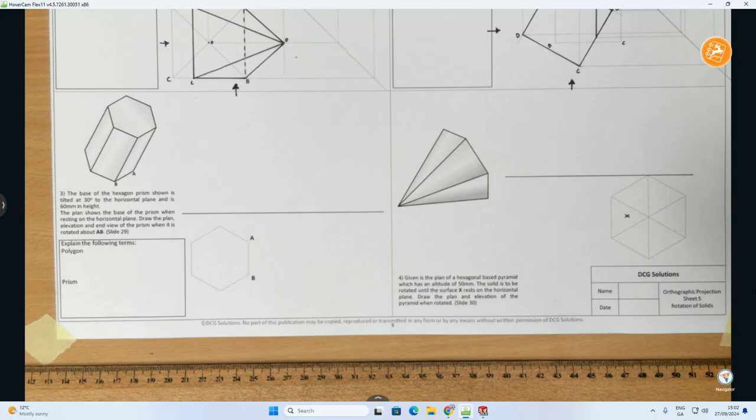Hi folks, so in this video what we're going to do is complete two questions based on the topic of rotation of solids, which comes under the area of orthographic projection. These are from the DCG Solutions workbook, and this one here is focused on a hexagonal based prism. So starting with the hexagon, just going to zoom in on that one now. We'll start that.

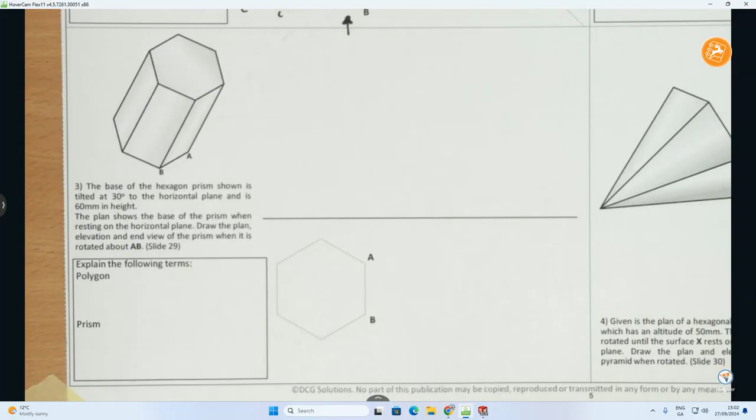So this is kind of an advancement from junior cycle graphics. If we just read the question, it says here the base of the hexagon prism shown is tilted at 30 degrees to the horizontal plane. So a little bit of information there.

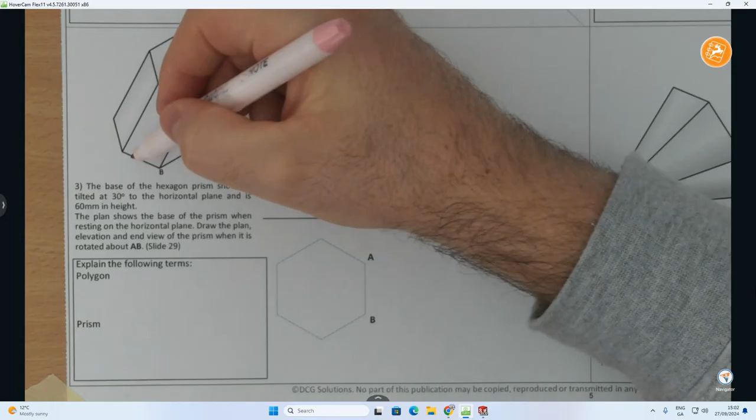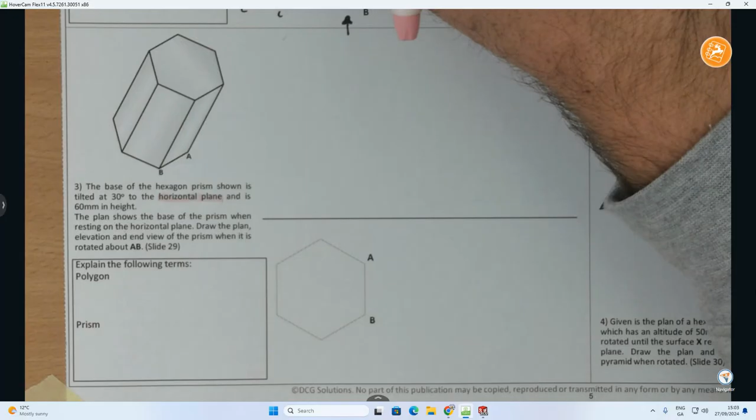What does that mean? That means that the base of the prism, if you look at it here, is actually tilted up, so it's not sitting flat anymore. It's like we took it and tilted it at a 30-degree angle to the horizontal plane. The horizontal plane essentially means it has been tilted up at an angle in relation to the ground. Now, where is our ground?

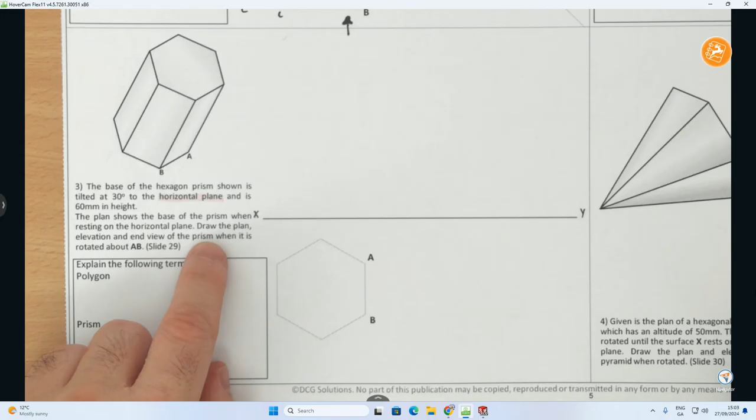Our ground is the XY line. I'll just put that here, X and Y, that is our ground. It says here it is 60 millimeters in height. The plan shows the base of this prism when resting on the horizontal plane, so this is what the plan of the prism would look like when it is sitting perfectly flat on the ground. Draw the plan, elevation, and end view of the prism when it is rotated about the edge AB.

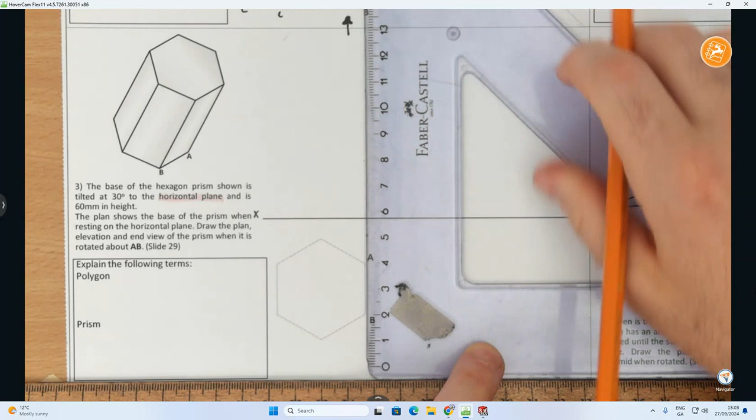Okay, so what we're going to do is start off by drawing this prism as if it was just flat first. So all 6 points on the base would literally come straight up. So AB will come up, and it has a height as well. So this will come up, and this edge would also come up.

Now, all I'm going to do here is measure up 60 millimeters because that's the overall height. So using my 10 up as far as 16, that's 60 millimeters. Project the line across. So there we have our prism when it is up at that height.

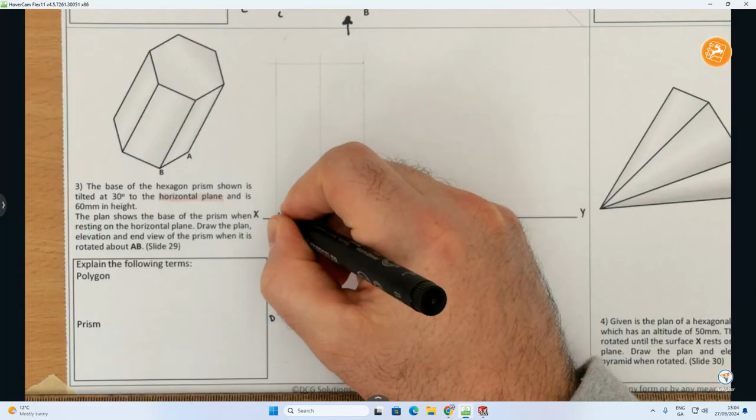Now, for demonstration purposes, I'm just going to put in the letters C, D, E, and F. The edge AB on the ground would be here - I'd have B at the front, A at the back. This one would be C at the front, F at the back, and finally D at the front and E at the back. So it goes inside. Okay, so there we have it. That is exactly what our prism would look like when we're looking directly at it.

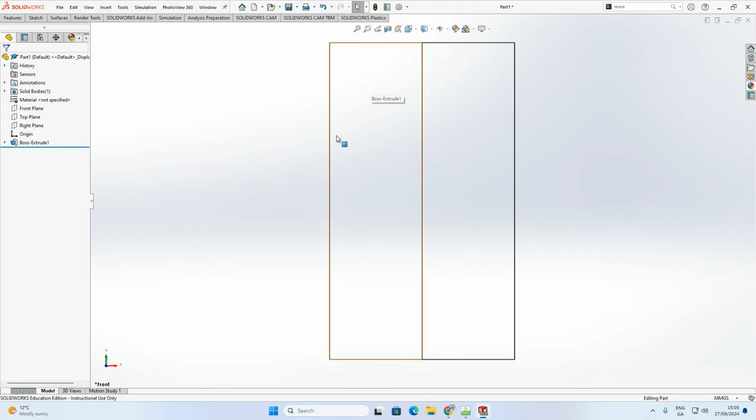Okay, so if I just take you into a SolidWorks model here, there's our prism, and if we look at the front view of the object, that's what it looks like. If I just go into the display style and put it in that way, that's exactly what we see - there's our 3 vertical lines, and then our 2 horizontal lines at the top. It looks the exact same as this guy right here.

Now, what they've told us is that the question says the base of the hexagon prism shown is tilted at 30 degrees to the horizontal plane. Okay, so what does that mean? If we go back into the SolidWorks model, and I'm going to put back on the color - essentially, if you imagine there's a ground line here, that is the XY line, and it's tilted at 30 degrees.

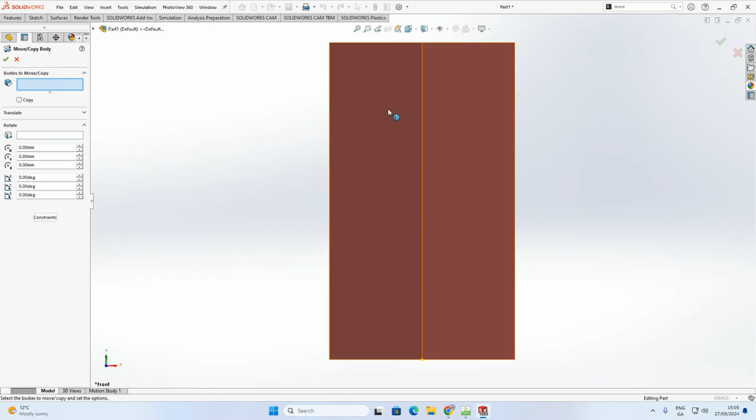So what we're going to do up here is a move body. I'm going to go in here and move this body. Here's the object, and my rotation line is going to be this guy here - that's my edge AB, that line there. Okay, and what I want to do is go back to the front view, and all that's going to happen is it's going to rotate about this point.

So watch what happens here. As I move it, it's going to slowly move, and you can see it's starting to move there, and I want to keep moving it until it gets to 30 degrees. Okay, so there we have the object - it has been rotated, and now the base is not sitting flat on the ground anymore. It is up at a 30-degree angle.

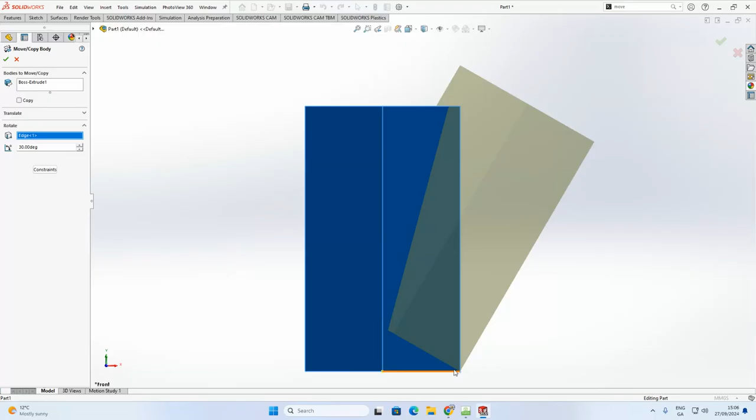I'm going to accept that, and that's what our object looks like. So it went from this position, and it's after rotating up about that point at the corner here at a 30-degree angle. Now, how does that change what it looks like in our drawing? That's what we have to do.

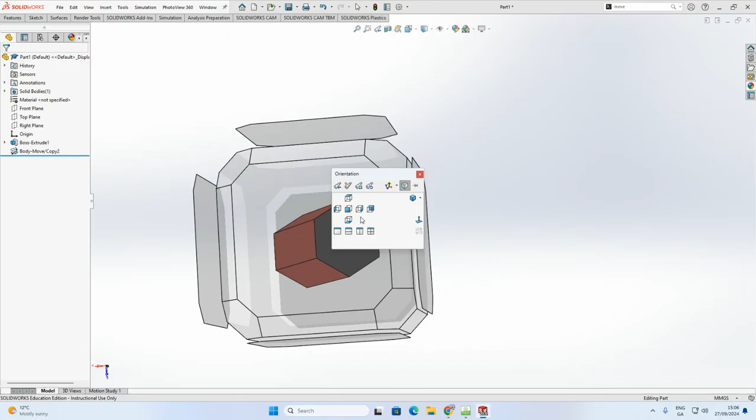In the elevation, we're going to see this shape, but in the plan view, I'm going to see this. When I'm looking down on top of it, I'll see that shape there. I think I have it tilted the wrong way there in relation to our sheet. This is the side we'll kind of be looking down on top of. If I come down and look directly on top, that's the shape we're going to see, and obviously we'd have some hidden details involved as well. So that's the question, and that's the idea.

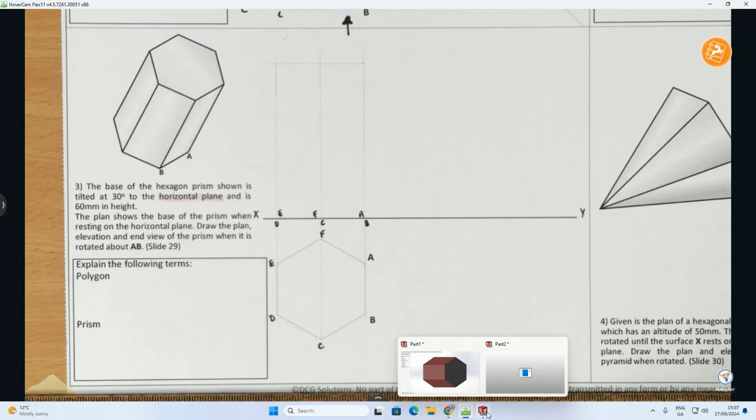So all we're going to do now is AB is going to be our hinge line. As everything rotates, all the points on the object are going to rotate as well to an angle of 30 degrees. So if I get my set square, put it on AB using my 30-degree set square, I'm going to do a line, and that line there is at 30 degrees in relation to the horizontal plane, the ground.

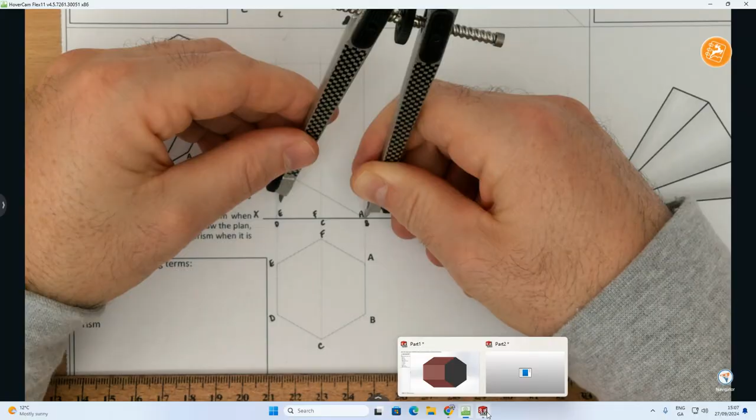Now I'm going to rotate the points. A and B is my fixed point. I'm going to bring them in until it gets to D and E. I'm going to rotate until it comes up. I'm going to do the same with F and C until it comes up, okay?

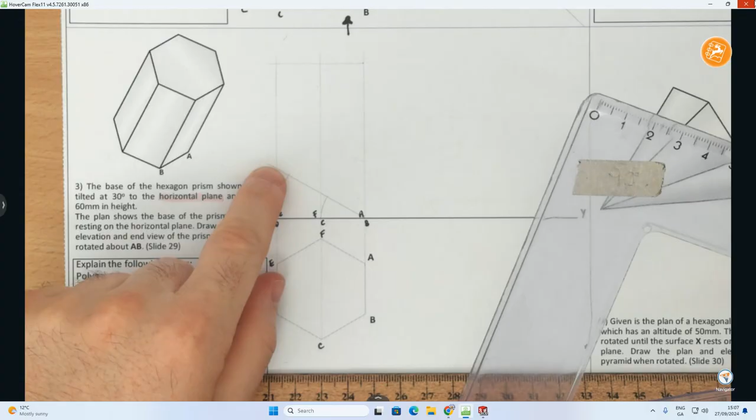Now what I often say inside in class is, how do I get an angle that is going to be perpendicular to the 30 degrees? Well, all I have to do there really is add 30 - what do I add to 30 to bring it to 90? So this angle is at 30, 30 plus what makes 90, 30 plus 60.

So all I'm going to do now is go up at 60 degrees. That'll be perpendicular from this point, because F and C has moved up to this position now as well. As it rotated, the edge rotated with it, and there we go. So that's my rotation lines.

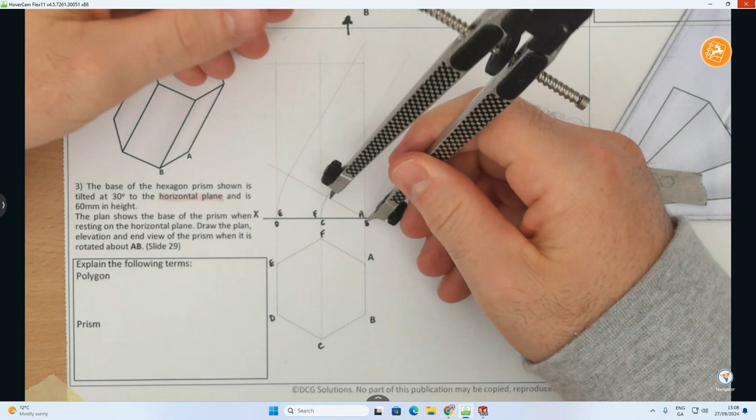So it's like I'm after tilting it up, and now I have to find the new points here at the top. It's the exact same thing. Now I only need to find one of them. So using A and B as my hinge line, or hinge point I should say, I'm going to find this one here. Make sure I have it.

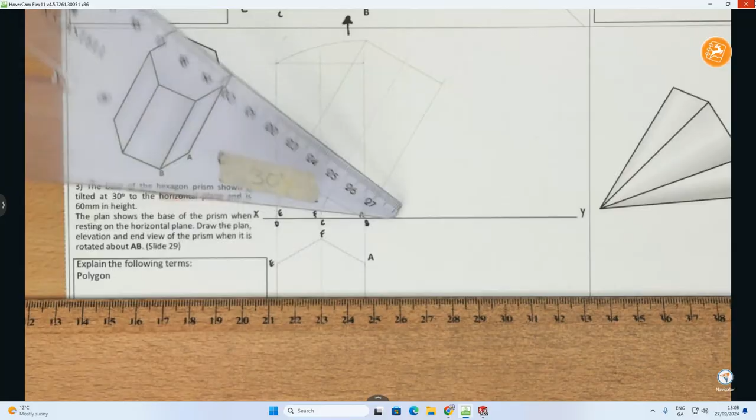Yep, I rotate that. You can see it hits right there at the top, and that line coming down here has to be parallel to this one, because it's perpendicular to the 60, so 60 plus 30 makes 90. And there we go. So I've now drawn in my prism when it has been tilted 30 degrees to the horizontal plane. Just really quickly, heavying this in with my marker.

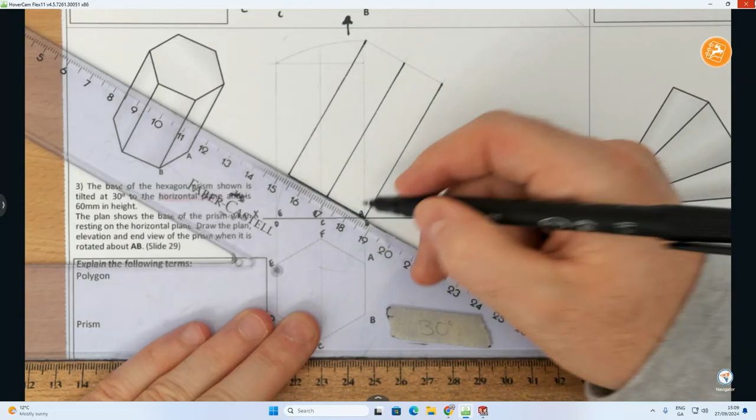And here we go. So there is the elevation. Now I have to get the new position of the plan, so everything has moved now. In the plan I'm looking directly down on top of it, so I would see the actual hexagon here. So I'm going to get that first.

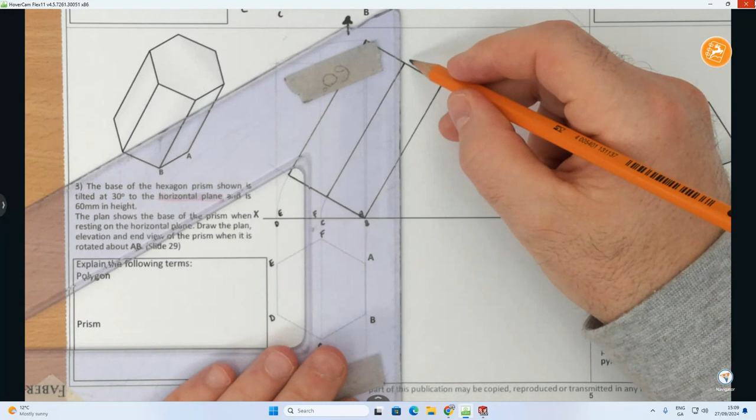So this guy is going to come down. It'll be very close to it - actually looks like it's bang on it. That's pretty close. We'll get this one down, and this one. Okay, now all that's going to happen is, as it moves, the new positions of A and B, this point's there on the ground, but the top points, okay, they're all going to move out as well.

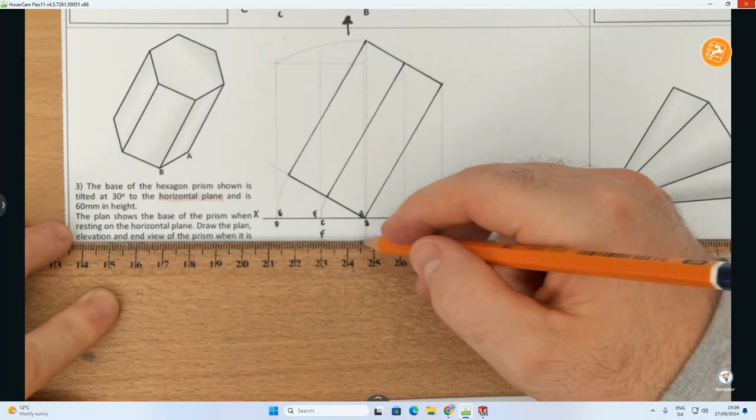So from these points here, they're going to come out, and out there, and there. And all we're going to do is locate those points. So those points are, from the top of it, I've got 2 points here, and here. Another point there and there. They're the outside points, and here. So that there is my hexagon shape on top.

So there's the one on top.

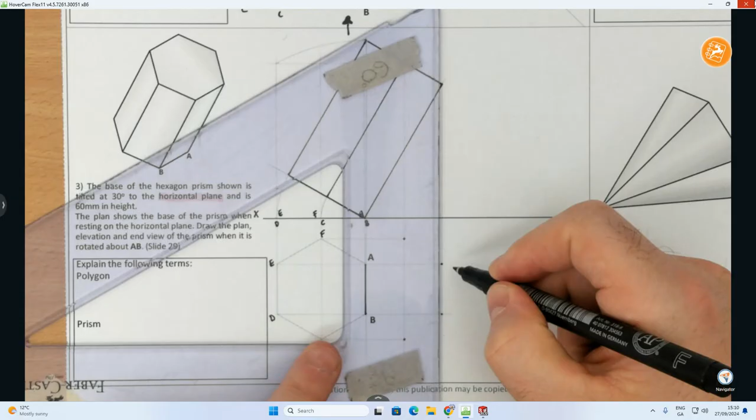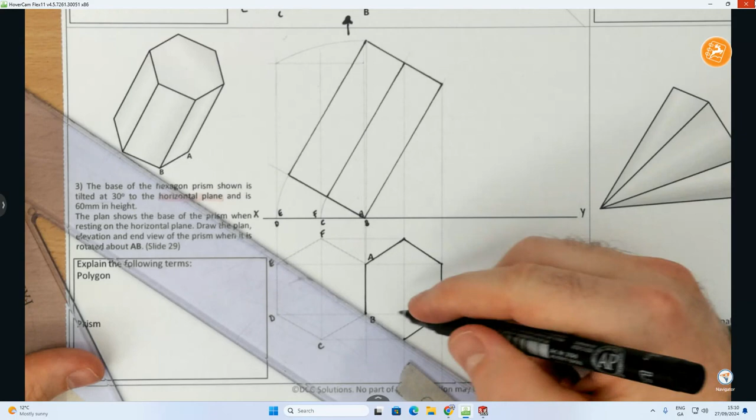So I can see that surface there on top, and now it's about finding the surface on the bottom and then connecting up the faces down along the length. So to find the points at the bottom, D and E are not here anymore. They're going to be somewhere along these lines, but the new position of D and E was when I moved up to here. So I'm bringing it down, and I can find the edge for the new position for D and the new position for E.

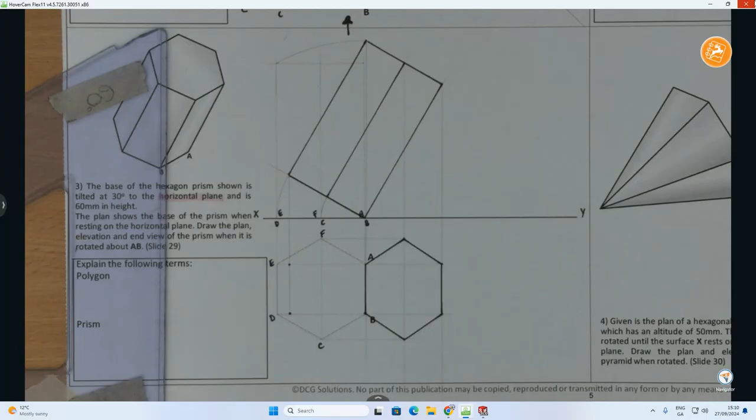I'm going to find the new position for F and C, which was originally here. It's now here. So let's find those. There's F, there's C, and then the base is still in the same position.

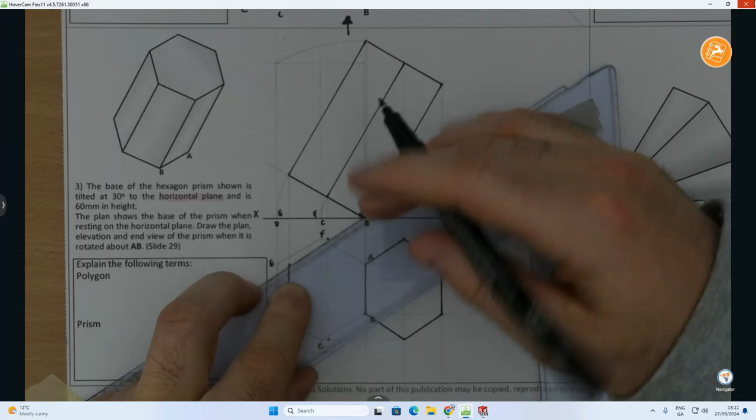So it's just a case of heavying that outline detail. There we go. And there's that one. And now I'm going to heavy in the faces that we can see.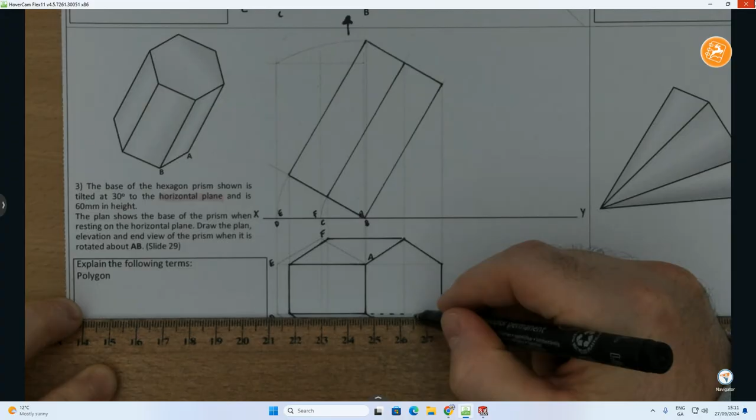So I can see this face, I can see this face. As I'm looking down on top of it at an angle, I can see that face, I can see the outside faces. Now we just have to heavy in the hidden details, and there'll be faces here that I can't see. So as they run down, bit of hidden detail there, bit of hidden detail here.

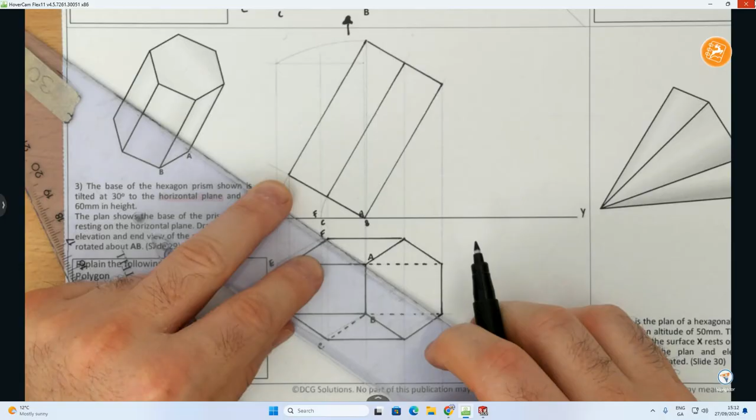And then the hexagon at the bottom, it's the exact same. Just making sure, yeah. There's that one, and then connecting up to this one. And there we go. So that's what it looks like when we look down on top of it in the plan view.

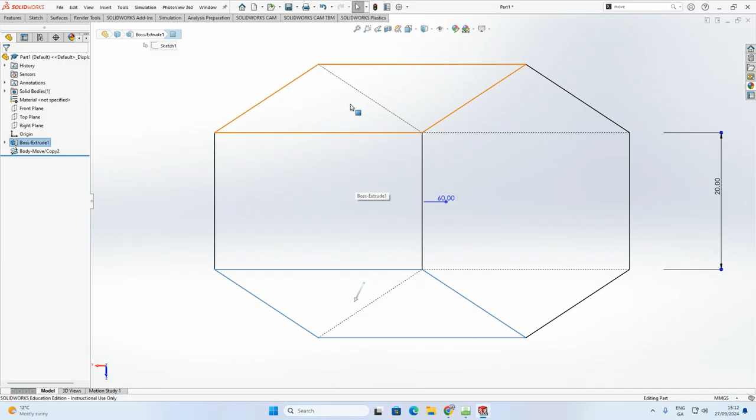So if I just refer back to my SolidWorks model here, and if I put in the color mode, there's the top face, there's the side face, side face, side face, and if I put in the hidden detail view, we can see the base down underneath it, that's the base, and then I've got the faces at the back as well.

So that's our object as we look down on top of it, and it has been tilted 30 degrees to the horizontal plane. So if I look at it straight on again there, you can see it, and then as I tilt it around, there we go. Sorry, I actually tilted that the wrong way. This way. There we go.

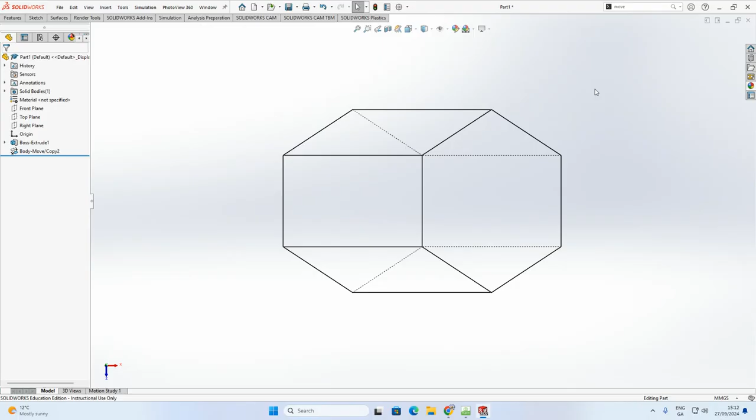Okay, so now we're going to move on to the next question here at the bottom of the page. So that's the first one done. Oh, I apologize, completely forgot to do the end elevation. So to get the end elevation, all we're going to do, using the rules of orthographic projection, is go 45 degrees from here.

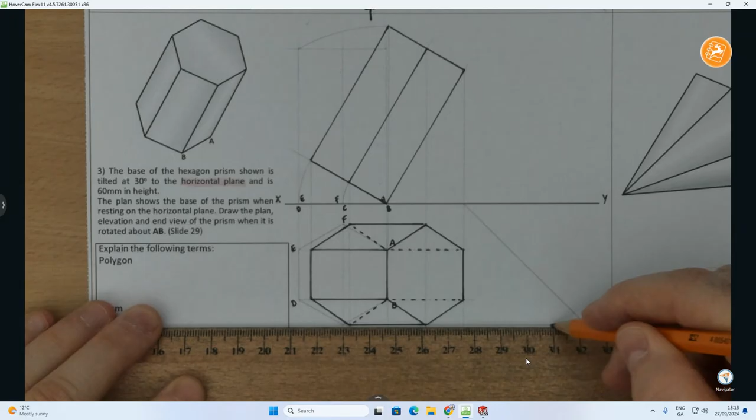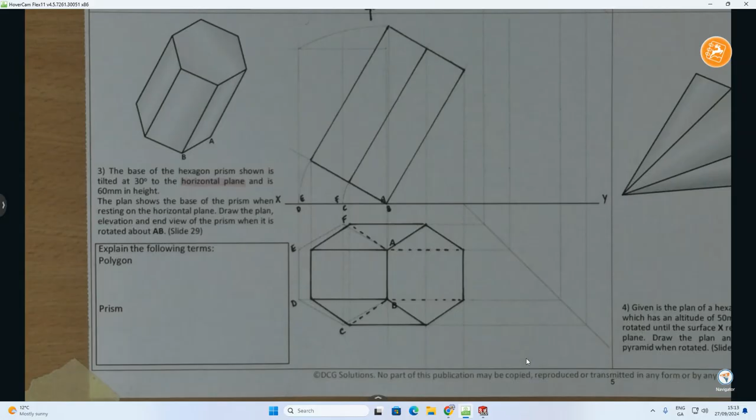All my lines are now going to come over, over, so there's my 4 points that have come over on the ground. It's going to go up, up, up, and up. So it's going to be somewhere up along those 4 lines for the end elevation.

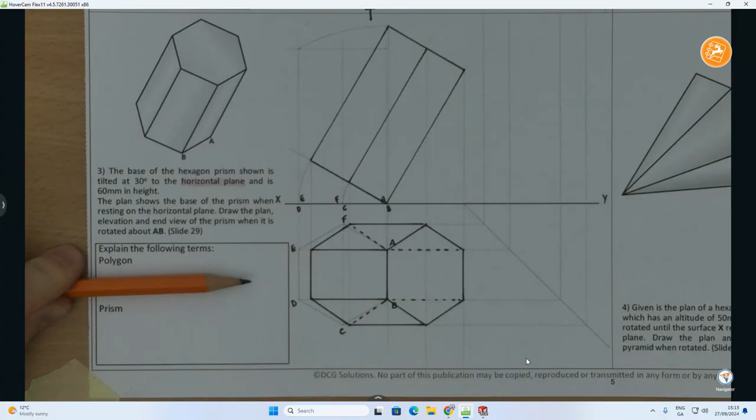And now I have to find, remember, it's like we're looking at it in from this direction here. So it's like I'm over here in the elevation looking in at it. So if I was a person standing here looking in this direction, yes, I would see underneath it a little bit, and I'll see all this face. The hexagon I actually can't see is the one here at the top, at the back. So as I'm looking in this direction, I can see underneath it, but I can't see over it.

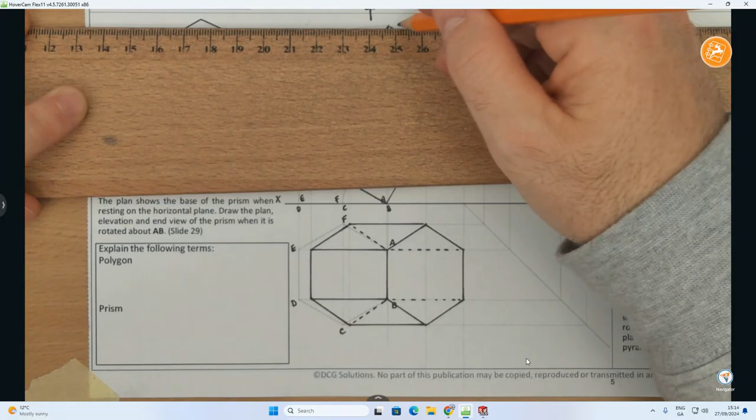So I have to project those heights across now. So this will come across here. This one comes across. I'll do the same with the top one. Have it ready. It's actually in the middle, so I need to go out the whole way. This one. Okay, that's the exact same thing, just heavying in the correct parts. So, sorry, get the right ones.

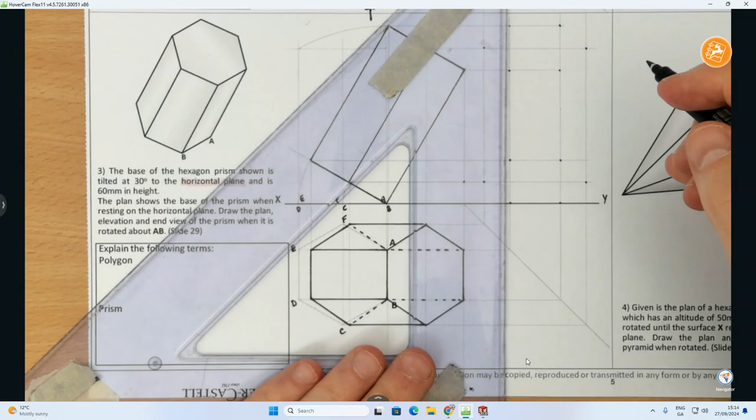So that's my base hexagon, which I can fully see. And then I'm going up as far as here. That'll be in hidden detail. So, just to heavy this in. That's heavy. That's heavy.

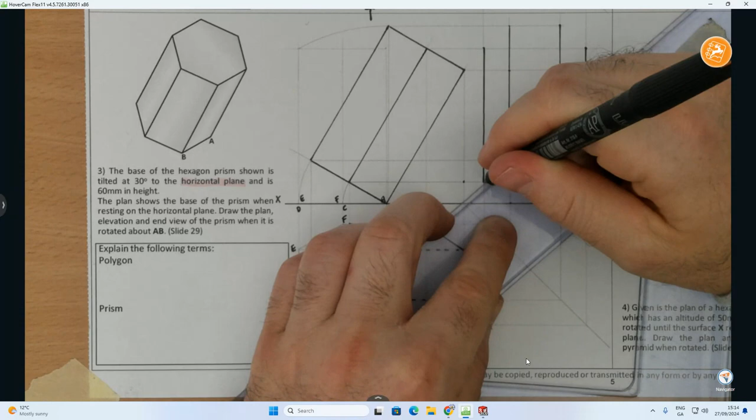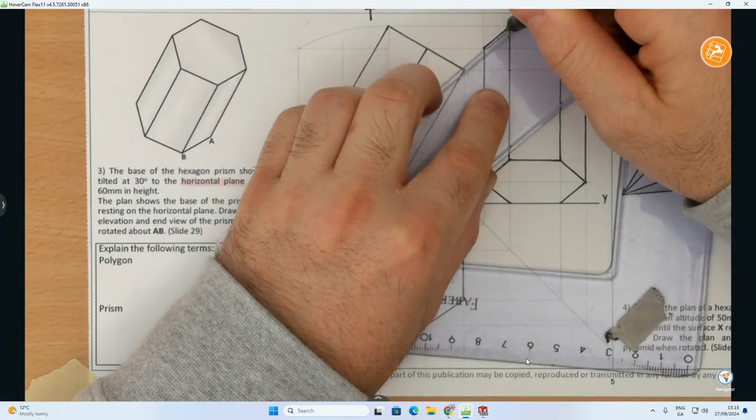Heavy. And heavy in the details in here then. This is the bit we can see, as I said, as it's tilted away from us. Same at the top. And hidden detail here at the back. And that's showing the hexagon at the top surface.

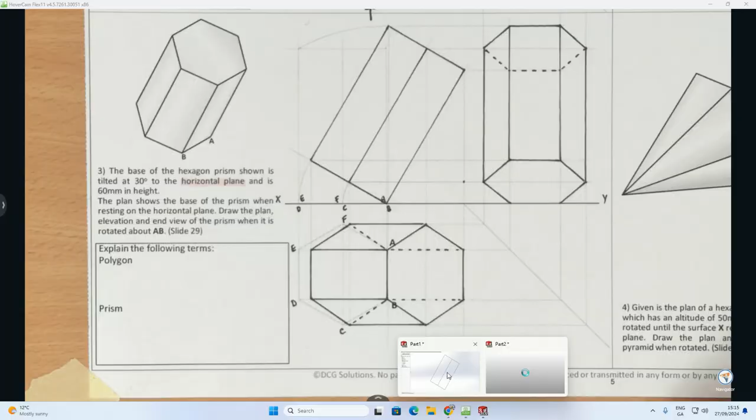Okay, and there we have it. So if I just really quickly refer out to our SolidWorks model here, that was the top of it. And if we go back down, this time it's like we were looking at it from this direction. But back on the colour, that's what we were looking at.

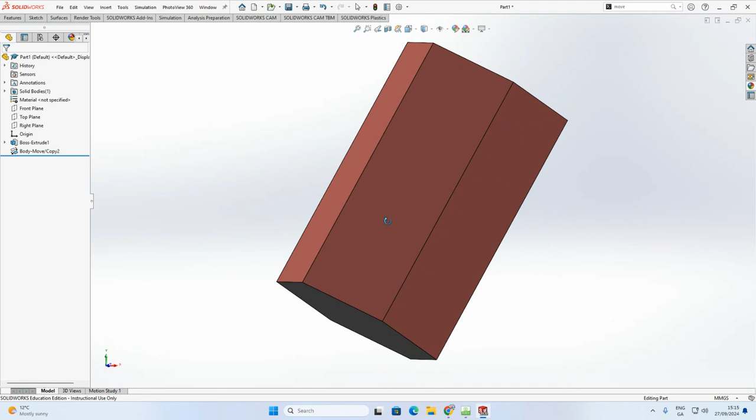So we had it originally in the front, then we had it on the top, looking down on top of it, or something like that. Back to the front, something like that, and then rotate it around. And that's kind of like we're looking at something there. Okay, and that's the idea.

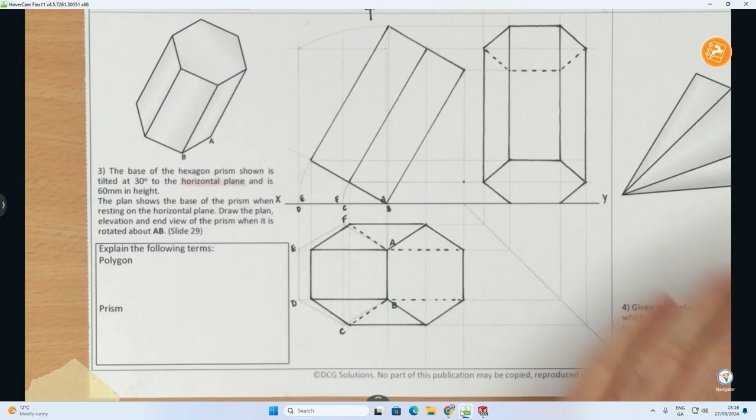Okay, so I'm going to save that one. Now what we're going to do is we're going to move on to the next question here, which is the hexagonal pyramid. So getting onto the hexagonal pyramid here.

It says here, given is the plan of a hexagonal base pyramid which has an altitude of 50 millimeters, so the height of it is 50 millimeters. The solid is to be rotated until surface X, which we can see here in the plan, rests on the horizontal plane. So we're going to have to rotate it until it hits the horizontal plane. Draw the plan elevation of the pyramid when rotated.

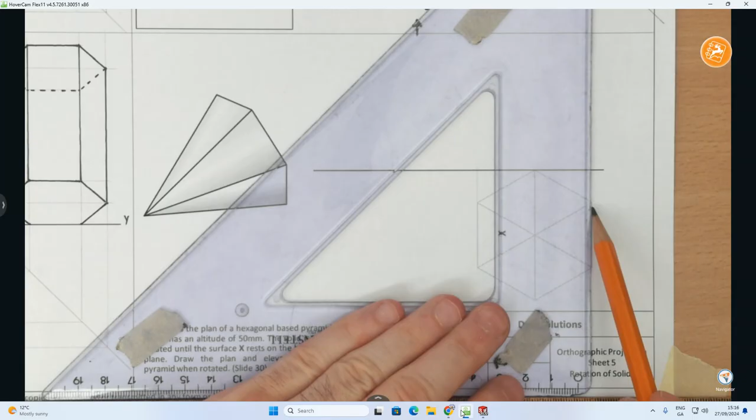Okay, so starting off, very similar to the last question, we're going to start off by projecting our points up to the elevation. And the apex, which is this point here in the middle, is going to go up there, and we're going to measure 50 millimeters above the XY line to get the height of it overall. So as far as here, we'll always draw the pyramid as we imagine it would be drawn when it's sitting flat on the ground.

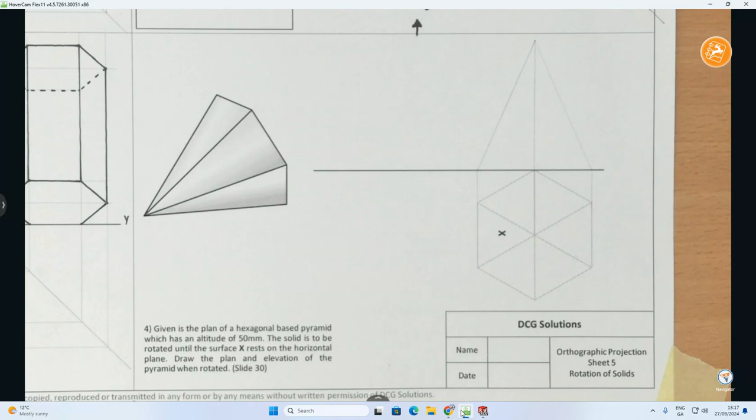Okay, so that's what our pyramid would look like. Technically, this view that I have here right now is when we're looking directly in here. So technically, I can see this face here and this face. I'm going to use labels once again, so I'm going to call this point here A, B, C, D, E, and F.

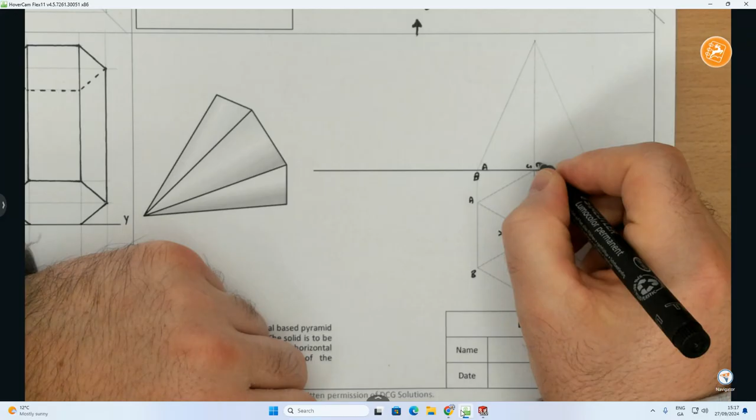And in elevation, well then I'd have A and B, or sorry, it should actually be B first, A on the inside. I'd have C and F, just going to put them there. And then I'd have D with E. Okay, and there's my points as I'm looking in.

Now, it tells us here, the solid is to be rotated until surface X, which is this surface here. I'll actually label the top point O as well. Okay, until surface X rests on the horizontal plane.

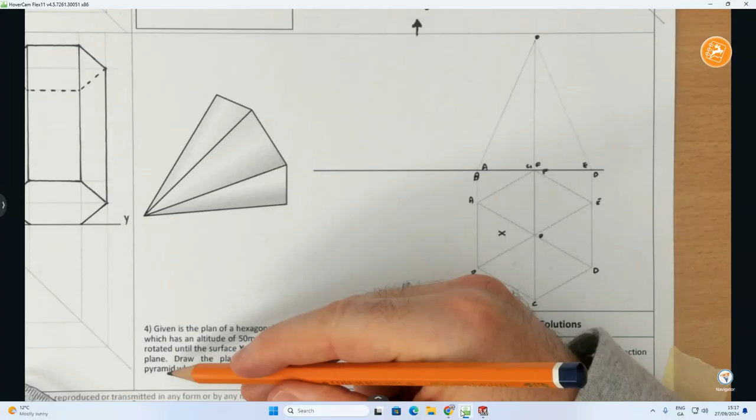So how do we do that? We want to rotate until this triangular surface ABO is sitting on the ground. And if you look at ABO in elevation, that is an edge view where we see it as a line in elevation. Okay, we're going to rotate that until it's on the ground on the XY line here.

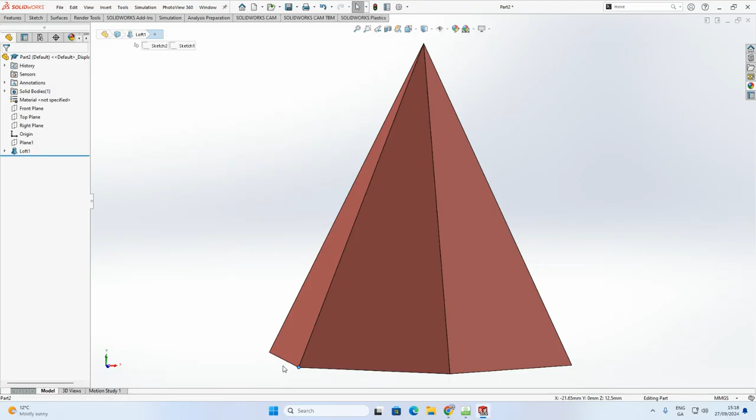Okay, so if we just go out to the SolidWorks model really quickly here. So here's our pyramid again, and if we look at it from the front view, that's what we're seeing. And this point right here is our edge AB. There's our edge AB, okay? But when we look at an elevation, we see AB as a point.

Now we want to hinge it around until this face here, that I've highlighted in blue, is sitting on the ground. So how am I going to do that? Same thing as I did last time, Move/Copy Body. I'm going to move the whole body, and I'm going to set about my rotation line, which is this point right here.

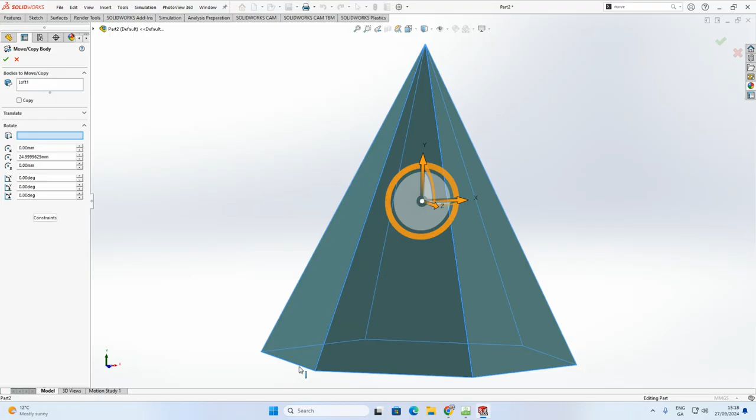That's my rotation line. Now, I'm going to go back out to the front view. This is what it's looked like. And all I'm going to do is I'm going to rotate it, and you can see it's starting to rotate there. Notice how these 2 points, this one and this one, are starting to just literally curve up around it. So I'll go a little bit quicker here now. And you can see that there. And I want to keep rotating it until it

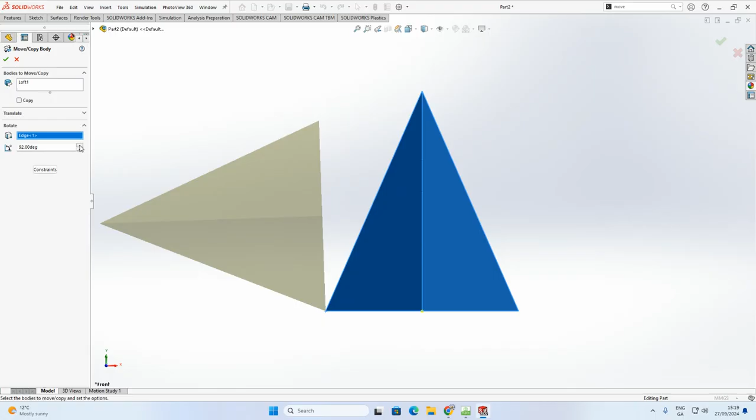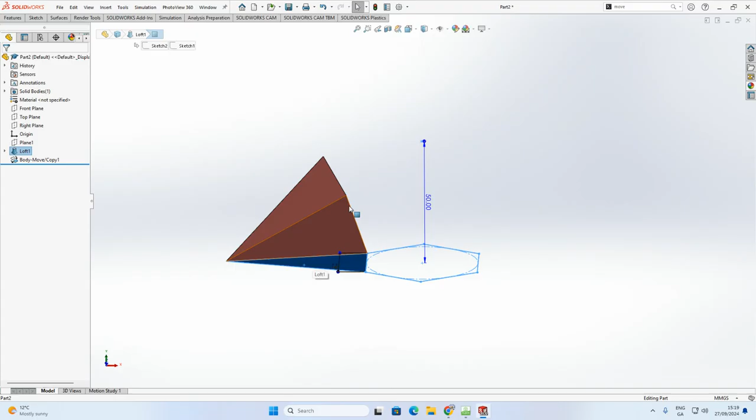falls down flat on the ground. We just keep going. There we go. Okay, so that's what it's going to look like. So accept that there now. So in stage 1 it was like this, and then in stage 2 we rotate it and it looks like this. Okay, where the same point here stays the same, AB, and it's going to rotate until that surface here sits on the ground. Okay, and you can see there in relation to where it went, that surface there is rotated. Okay, so that's the idea.

So how do we represent that? So we've drawn it in elevation, we have it in plan. All we're going to do is we're going to hinge it around. So we're going to use our compass. AB is our hinge point.

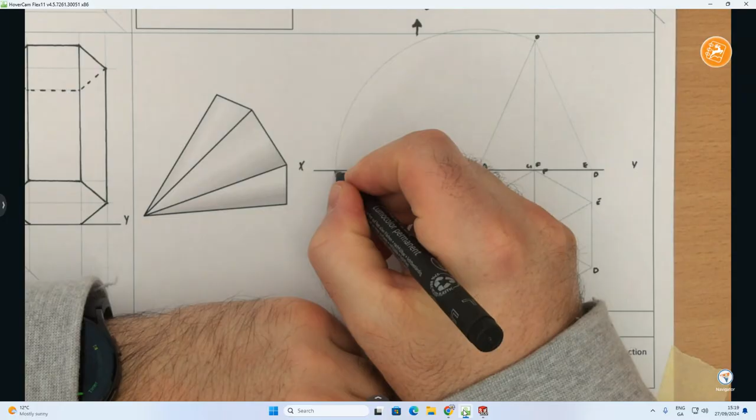I'm going to rotate O all the way around until it comes onto the ground. So the new position of O is here. Okay, now this next bit is a little bit tricky.

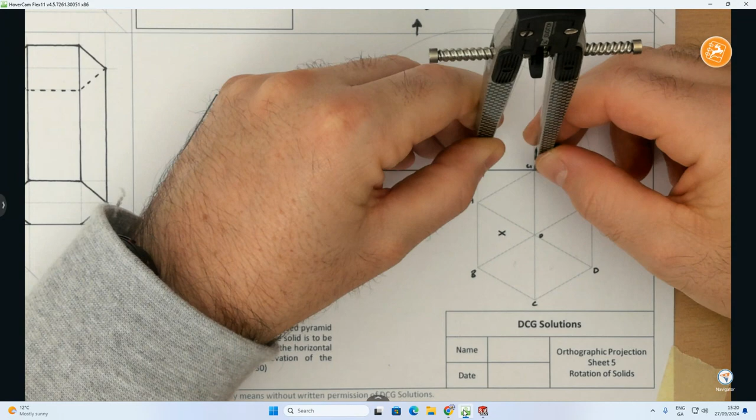AB is going to stay in the same position. Because AB stays in the same position, but the base is going to move up, then E and D are also going to move up. So E and D will rotate up like this, and somewhere along that rotation is E and D. Likewise with C and F, going to be somewhere up there along that.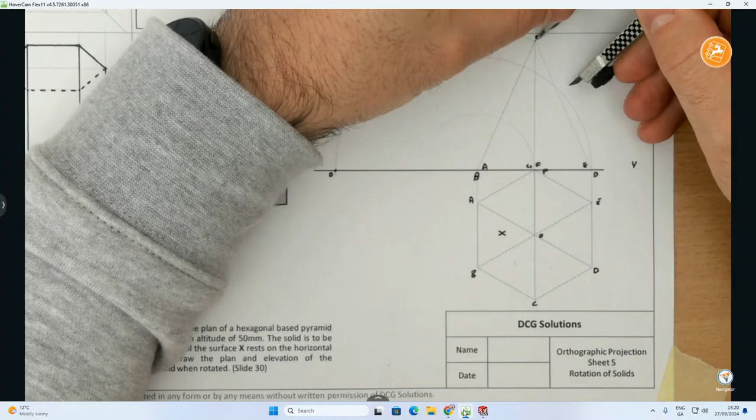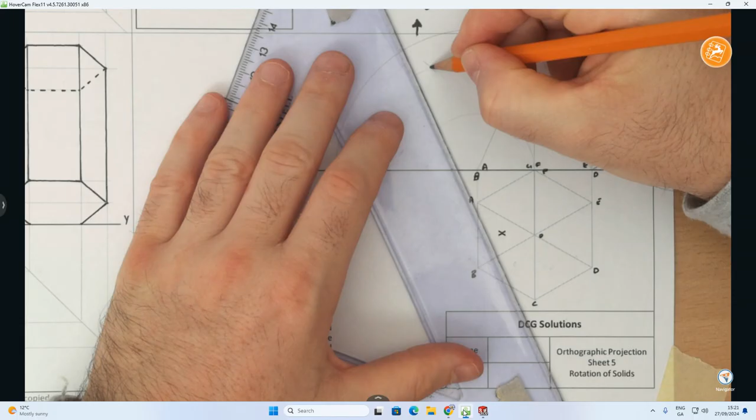Now how do I find the exact position of E and D? I already have the position of A, B and O. That line, A, B, O, which was originally here, is now here. So because I have the new position of O, I can take the distance from O down to ED on my compass, go to my new position for O, and where it cuts through the ED arc, I can find it. All I do then is connect this point back to AB, and then to O, and this point C and F, when it rotates around, has to be on that line. So there we go, follow it around, and that is the new position of my pyramid.

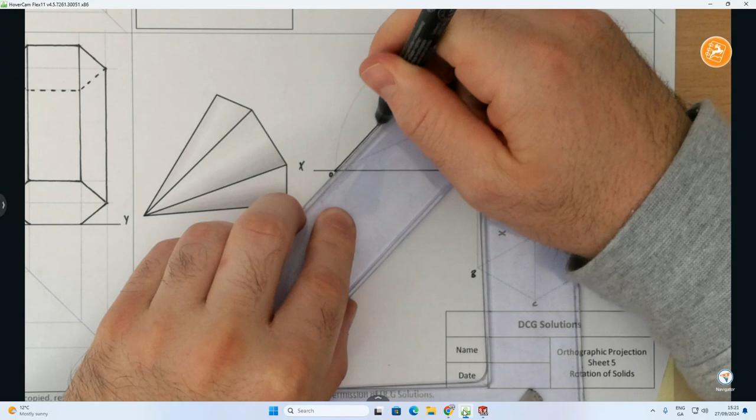I keep saying cone, sorry, pyramid, when it is resting on the horizontal plane, when surface X is resting on the horizontal plane. That head bit in there. There's the edge here. So there we have it, guys.

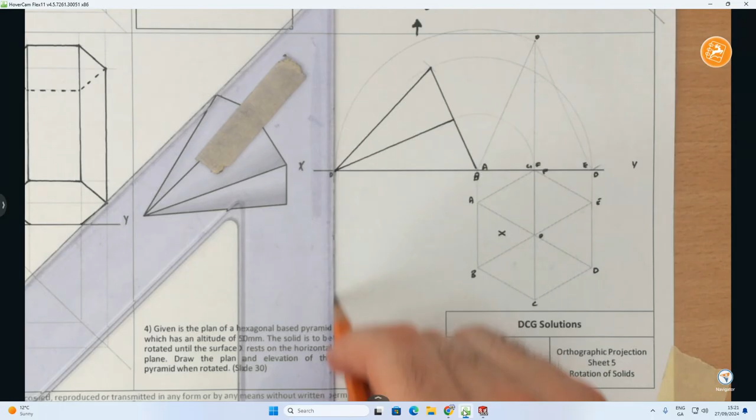Now all we're going to do is draw the plan view of that. A and B will still be in the same position. I want to find the new position of O, so on plan, O just comes straight down. O is now going to go across. A and B will be in the same position.

But if I want to find C and F, well, C and F's new position is here. So if I bring this line down, to find it, C comes out, F comes out. F is already out there. So there's the new position for C, which connects to B, connects to A. There's the new position for F. And I should put O out here as well while I'm at it.

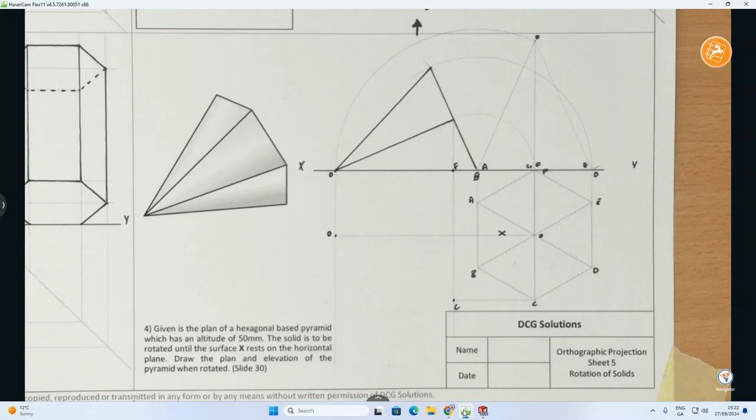Okay, and now I want to find the new position for E and D, which was here. Now I need to find it down here. So D comes out, E comes out, and it's simply a case of finding them. There we go. Now what we have to understand, there's D, there's E.

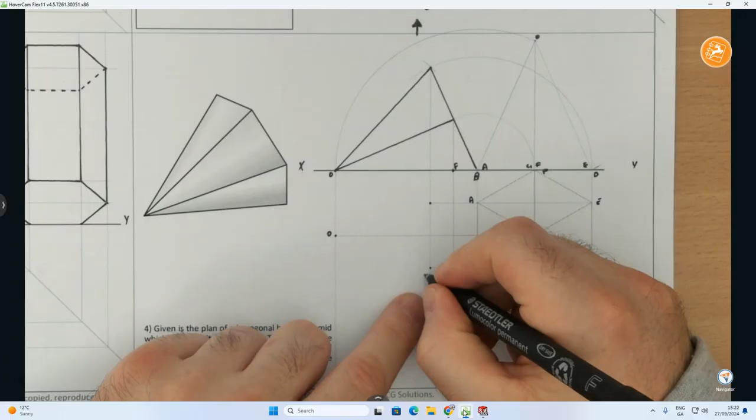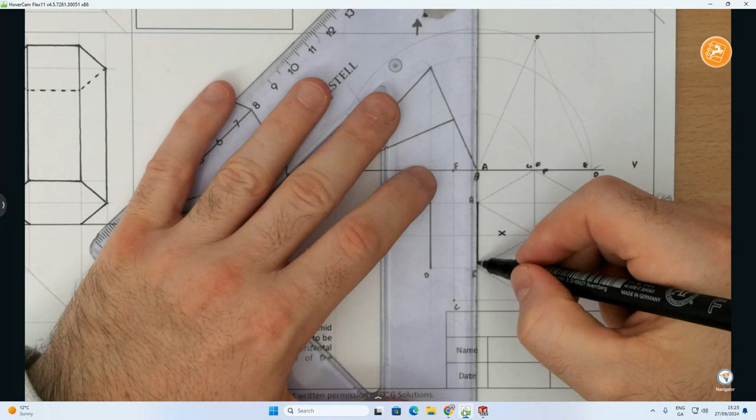What we just have to understand is when we're looking down on top of it now, in the plan view, when I'm above in the sky looking down, yes, I can see that hexagonal face. I'll also see this face, and I'll see 3 faces around the side with some hidden detail. So if I get that hexagon heavied in first, A and B, okay, so that's the hexagon as we see it, looking down on top.

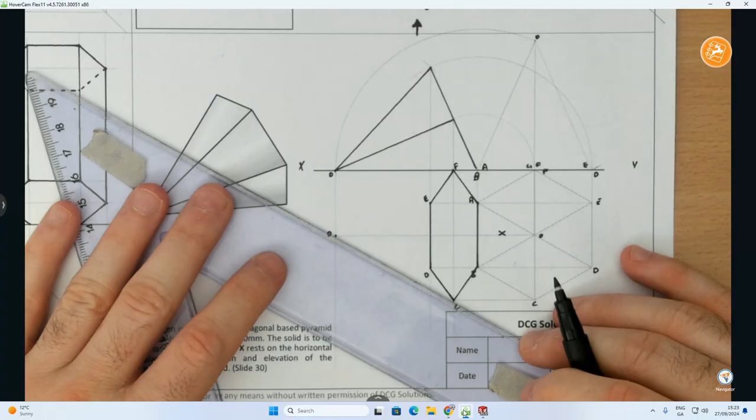There we go. And all those points then are going to connect to the apex. So I can see C, I can see the edge D, I can see O to E, and finally O to F.

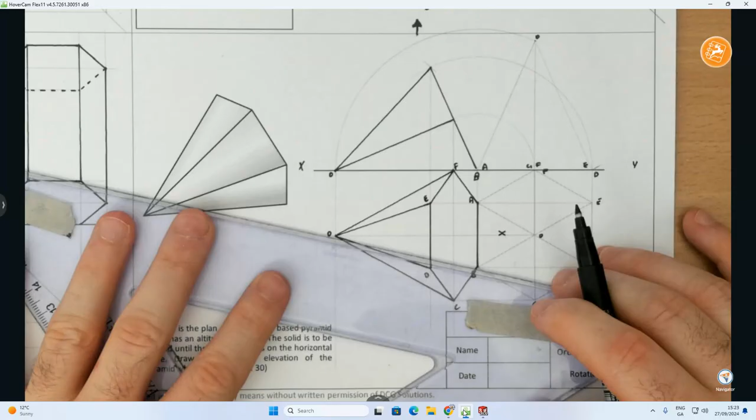Okay, now the edge A to O and B to O, just because I don't see them does not mean that they're not there, so they'll also go in as hidden detail. Because that actually represents my surface X, which is on the ground, and because it's on the ground, all the other part of the object is in front of it. So that triangle ABO is the one that's resting on the ground.

Okay, so there you have it, folks. That there is the question complete.

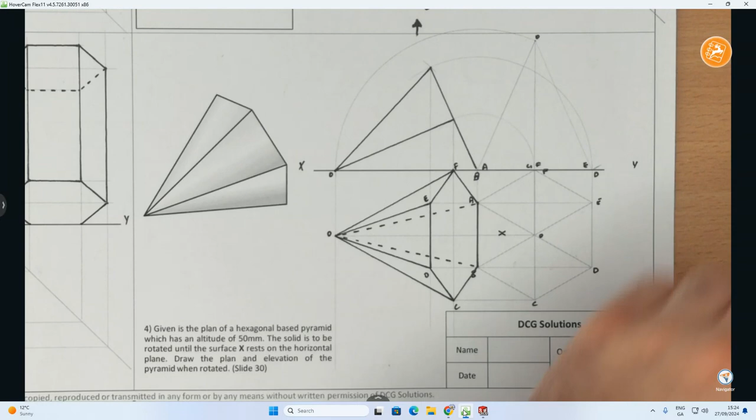If I just go really quickly back out to the SOLIDWORKS model, and if we look at the front view, that's what it looks like when it's resting on the ground. And if I look down at the bird's eye view, I'll actually rotate it. And there we go, that's what we see. And if we go into the hidden detail, it's the exact same as we have in our sheet. Exact same. So there we have it, folks.

That is the 2 questions there completed on the rotation of solids, one based on a prism and the other one based on a hexagonal pyramid. Hope you found those helpful.